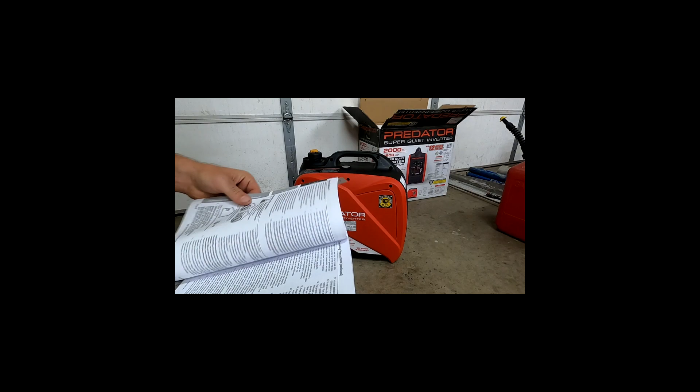Thanks for watching. We'll go over just a couple things in the book quick. Most of the time you don't read this, but it's nice to review it when you first buy it at least. Has a chart, tells you your minimum wire gauge for extension cords. The further you go out, the heavier wire you need.

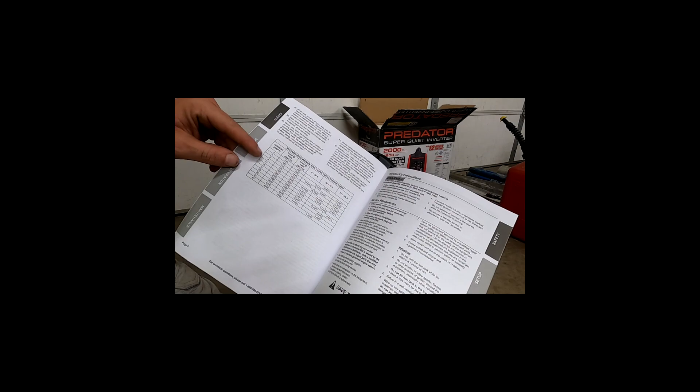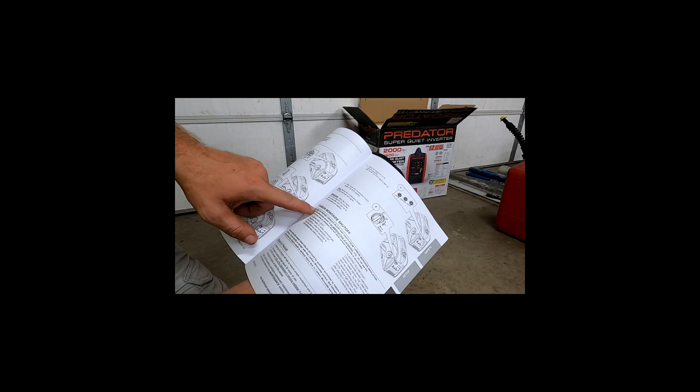What else is of importance? It does have a carbon monoxide shutoff, so if you get too many fumes, you'll have a flashing red light. Let you know to shut it down and move to fresh air.

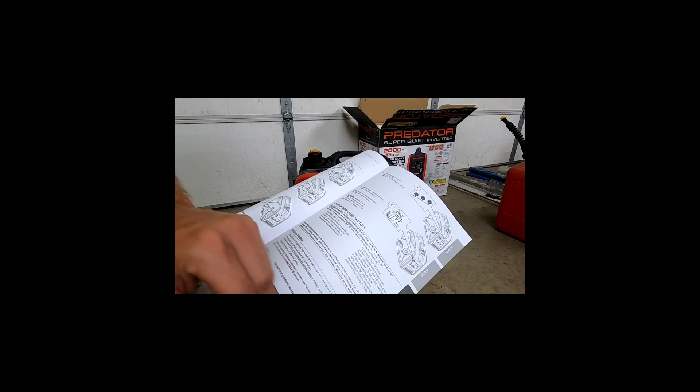There is a break-in period here. It says 30 hours of use, do not exceed 75% of generator's running wattage, and then change oil after 30 hours. There's not an hour meter on this model, so you'll have to try to keep track of hours.

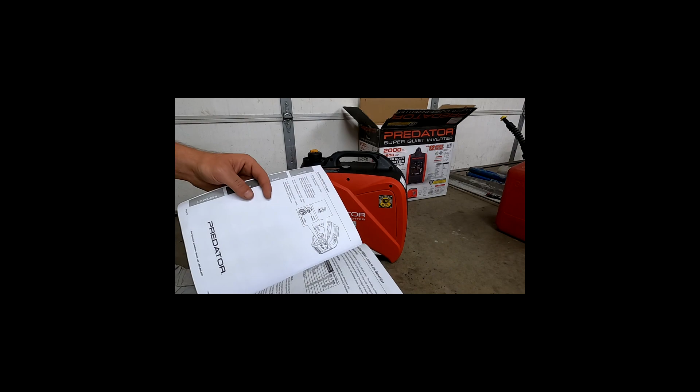It runs, they say, about 12 hours on a tank of fuel, so maybe after 3 full tanks be a good time to change oil, and then you can run it full bore. I'm just gonna run it full bore out of the box. So they say you should break it in like you're gonna run it, right?

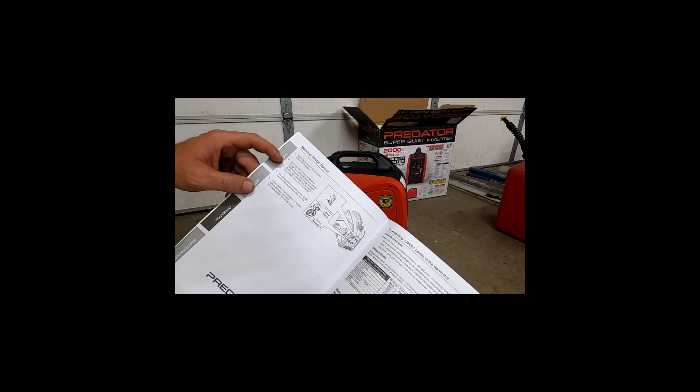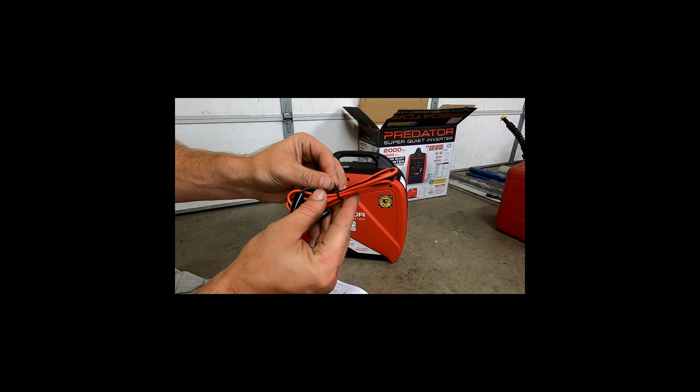Here's your nominal 12 volt DC output. So that is used to charge a 12 volt battery. So if you did need to charge your car battery in a pinch, the cable is not that long. Or if you wanted to take it on a boat, fishing boat, charge your battery, looks like maybe 2.5, 3 feet. So you could always wire up a longer one if you wanted, or figure that out. That is a nice option.

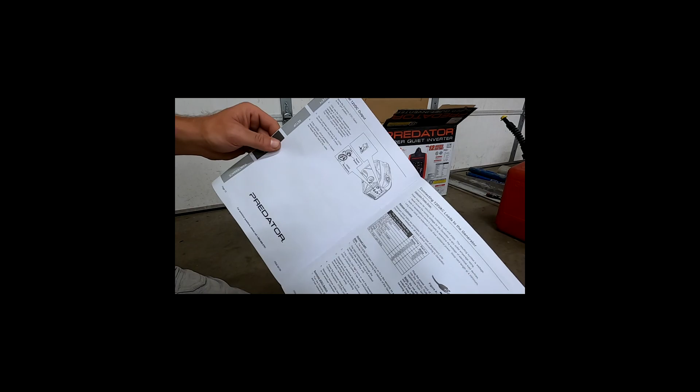What else here? Here's some of the, hopefully you can all read this pretty well. Some of the items you can run on this chart.

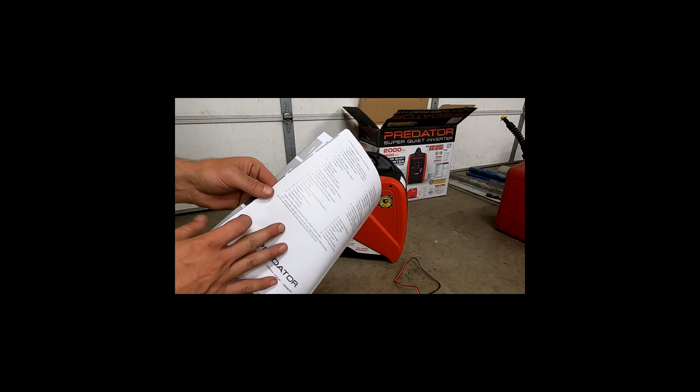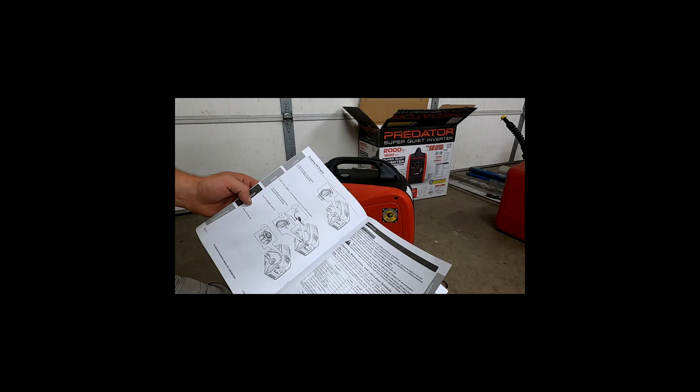And you do have the option to connect 2 of these together. And then you'd have 3,200 running watts. If you had 2 of these smaller ones, a lot of guys will use 2 of these smaller suitcase style, so you can lift them by yourself and still have good wattage instead of a big bulky one that you can't lift by hand easily into the back of a truck. What else? That's about it.

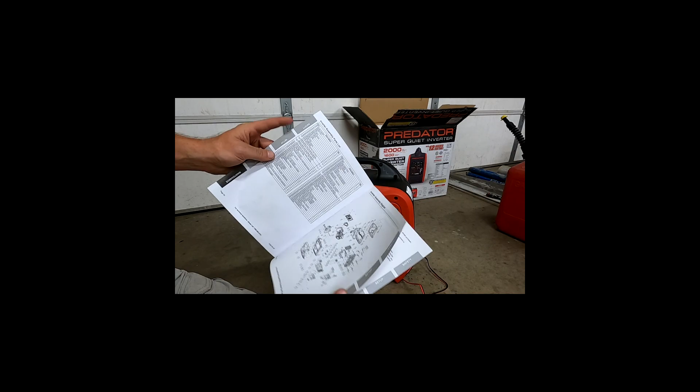Kind of an exploded view of the parts. No, they got pretty good warranty and a lot better price point than Honda or some of your other Generac ones. We'll let you know and keep you updated on it, but it does come with, you know, if you pay an extra $100, you got 27 months.

Anything breaks on it, anything goes wrong with it, you just go into Harbor Freight and get a brand new one. No questions asked. So that's worth it to me, especially doing construction and everything else. You can just take it in there and get the same one, you know, same day.